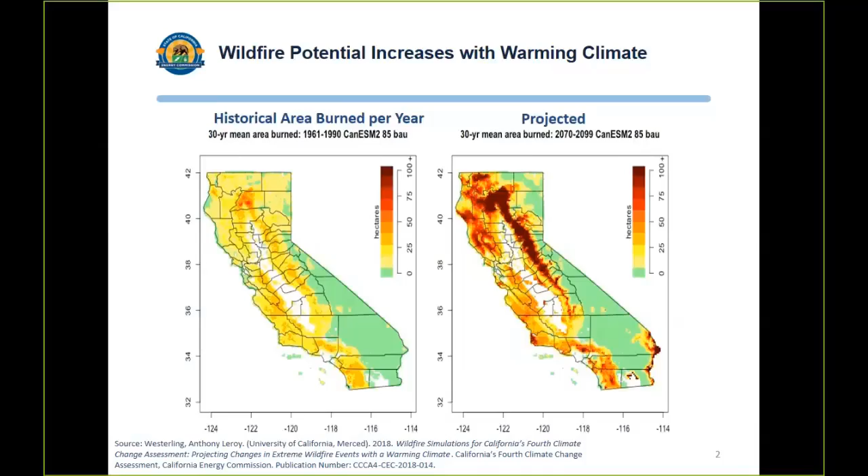One thing I do want to say is you'll hear from Dr. Larry Dale, who was funded by research from the Energy Commission, and you'll hear about his work and research that looks at the potential future risk to the electric system from wildfires.

We also have an ongoing solicitation that I want to make folks aware of right now, which is this grant funding opportunity to help look at a broader tool that can be utilized by the utilities and by the state, that will not only help look at forecasts for what the problems might be within, say, the next 7 days, but then what might happen over many decades.

This research, which is currently in the proposal stage, so we have not received the proposals yet, will help us develop a tool that will be more broadly used by the state and help us be more predictive in the near term and the long term. It'll also be utilized to help set up some scenarios and do some modeling for the fifth climate assessment. I just want to make folks aware of that. You can go on our research page and see the solicitation, and if you aren't already working on it, you can at least be aware of what's going on. Proposals will be due March 13th, very soon, and then we'll go through the selection process for that award. Up to $5 million, and it'll be a single award.

So let me move on to technology.

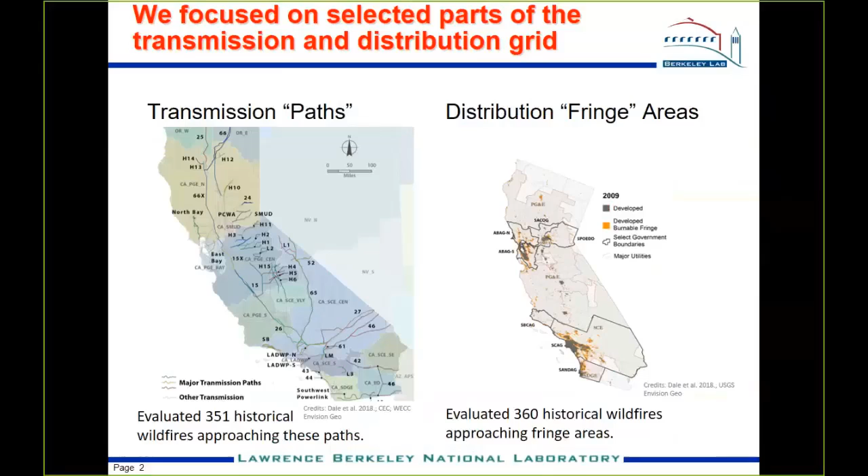Taking one of those samples, looking on the left there, is a part of the transmission grid. This is the inter-tie between the Northwest and California, which gives California access to all the hydropower produced up in the Columbia River Basin—important to California because we have a lot of green energy goals. On the right is the region around Los Angeles, and you can see in both places all those little pink or reddish-looking blobs. Those are wildfires. We only looked at a pretty short time period, between 2000 and 2016, but even in that one small part of the state up at the top, there were about 100 wildfires in that 16-year period. Of those, 16 came close enough to the grid that we thought we should look at it to see what kind of impacts occurred.

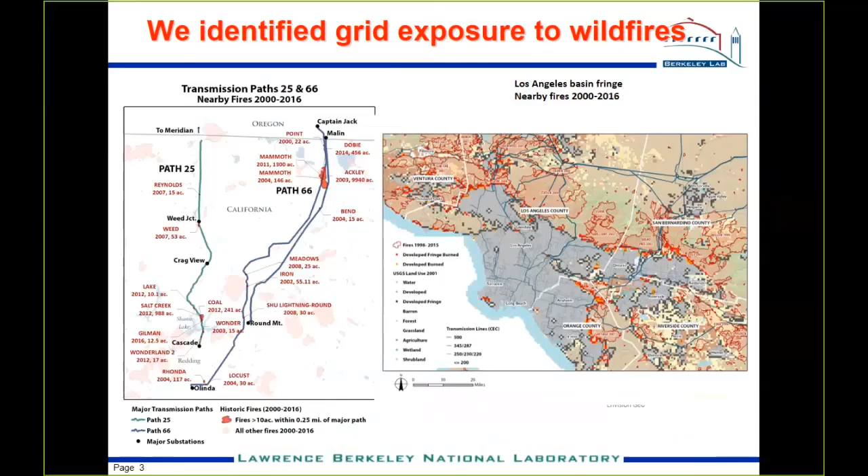On the right, around Los Angeles, there were way more wildfires. Southern California is subject to far more wildfires than we are in Northern California. Living up here, you may not know that, but it's definitely the case. So what happened when these wildfires came up against these parts of the transmission grid?

Here's a chart showing how we worked with CalISO, the agency that helps manage the grid for the state. We worked with them to find out what happened to about over 300 wildfires that approached those portions of the transmission grid.

What's shown there is indicative of what generally happens. Most of the time, nothing happens. A wildfire comes up against the transmission line, there's no outage, no disruption of service, no damage to the transmission line, and the system remains stable. There's no impact on generation either.

But some of the time there are some kinds of outages that occur, short sometimes, longer other times. Maybe more common is that they have to shut off portions of the generation system in order to access generation that won't be using lines threatened by wildfires. The general picture is a small portion of the time you have large impacts, and a large portion of the time you have small impacts or no impacts. That was true for transmission, and also really true for distribution.

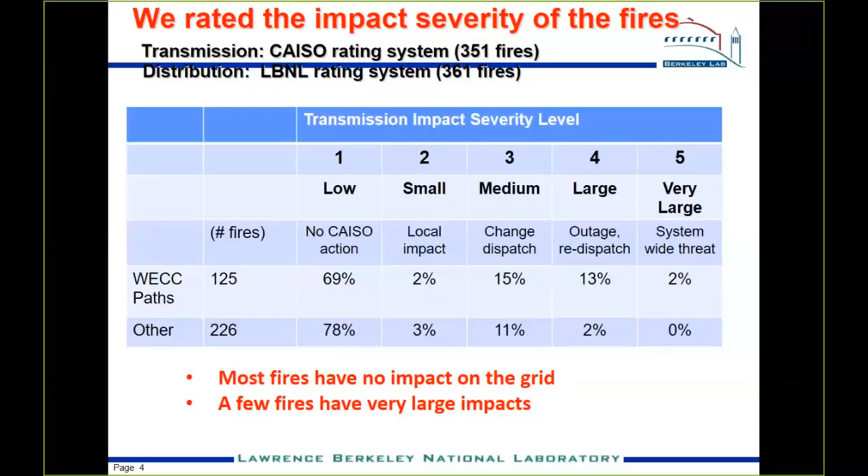Next, I want to talk about what the models are saying about future wildfires. The basic story is that Southern California fire risk is now highest in the state and has been for the entire record. But in the future, we anticipate large increases in wildfire risk in the mountainous areas for a lot of reasons that you may have heard about.

Possibly it's about drought, possibly it's about increasing biomass in forested areas—we're not thinning the forests as we used to. It could be about more homes up there, more people causing wildfires. It's really a bit of an open question, but future risk is growing, particularly in Northern California.

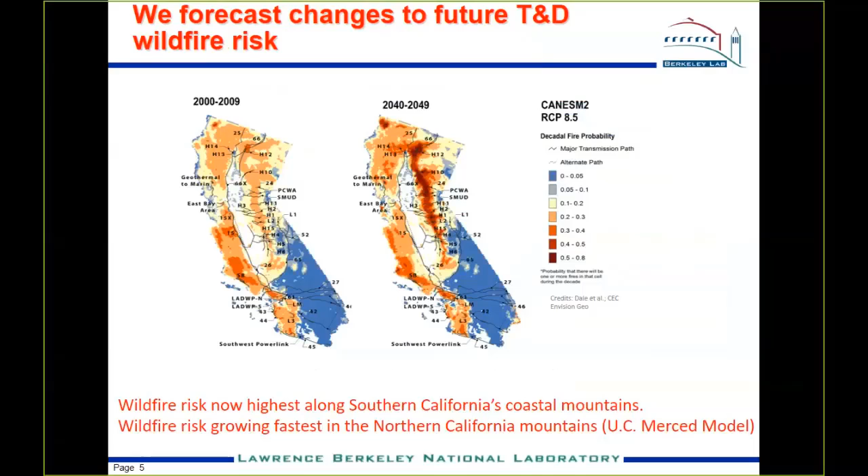The last part of the study was an evaluation of different adaptation options—what can we do about it? These were broad, big picture ideas about what could be done. You're going to hear a lot more about the details, the technologies that can eliminate wildfire risk. But in this case, we just looked at big picture options like undergrounding distribution, future planning that would limit the area of wildfire, and urban wildland interface (WUI) areas, in order to eliminate exposure to wildfires.

You can have microgrids to get rid of transmission lines, and you can diversify transmission. So those are just some big picture ideas.

My object here is to motivate the future discussions you're going to hear today, so I should say the whole study we did was in some sense overtaken by events. The major person working on our GIS mapping had to leave her house because of the Napa fires, so that delayed the study by a couple of months.

The wildfires in 2017 and 2018 effectively dated our study, because the cost of those fires was roughly equal to the cost of all the fires between 2000 and 2016. So we had to double the estimates of annual risk because of fires in one year that came at the end of our study.

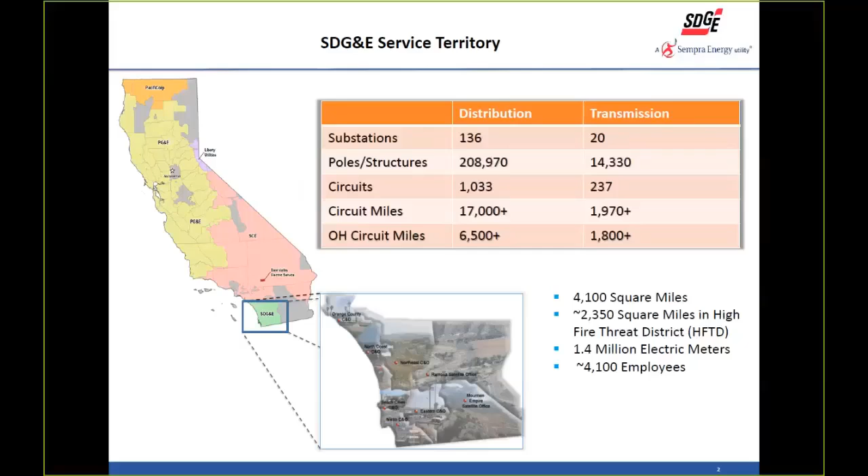So there's been an awful lot of work that has gone into fire mitigation over the last decade. One very critical piece of this is situational awareness - beginning to understand the problem well enough so that you can implement very effective mitigations. We do that in multiple ways: we look closely at the weather technology and the science, and we also take a very close look at engineering and operations. This has major impacts on our customers, of course, so there's a very large customer outreach portion of this.

But to start focusing on the fire science and the technology, we needed to understand Santa Ana winds better. I think that's kind of the basis.

How we went about doing that initially is starting in 2009, we were going to put a weather station on every single circuit that we operate in our high-risk areas. That actually resulted in 76 weather stations going in in 2010. We put in another 40 in 2011, another 30 in 2012. We're at 177 today and still growing. It's the largest utility weather network in the country, and has been for a long time, but now utilities across the state of California are building similar networks with a larger number of weather stations. The information we've gathered from this weather network over the last decade is priceless - over 100 million pieces of weather data that can now inform operational decisions, which are extremely important.

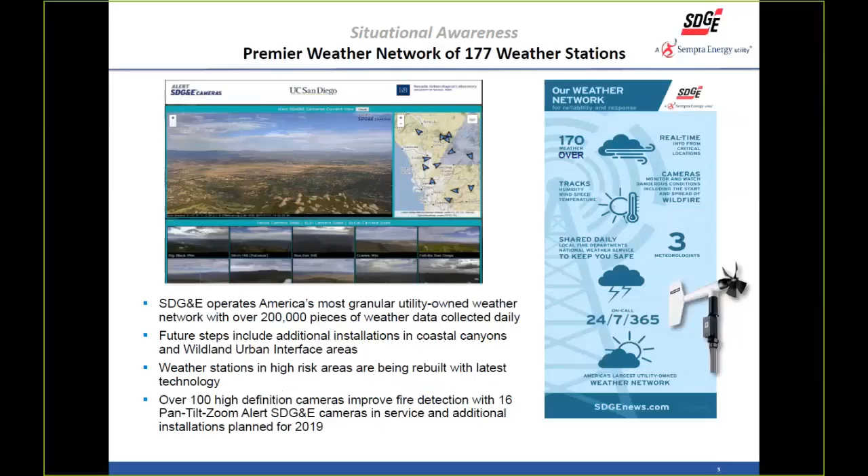And it doesn't only stop with the weather stations, it also goes into camera networks. Through partnering with academia and partnering with the community, we've enabled mountaintop camera networks right now to increase our situational awareness across our entire service territory, which means, like we've never had before, if there's an ignition anywhere on the landscape, we have real-time, high-def, pan-tilt zoom capabilities to understand very quickly if we have one of these low frequency but high impact events on our hands. Understanding that as early as possible is very important.

As we progressed in our adaptation to this increase in wildfire, we needed tools to understand what was the fire risk 365 days a year. Of course, partnered with the National Weather Service, they issued red flag warnings on days where we had extreme risk. But the reality is that we operate the electric system day and night, so we needed something that gave us the fire potential every day.

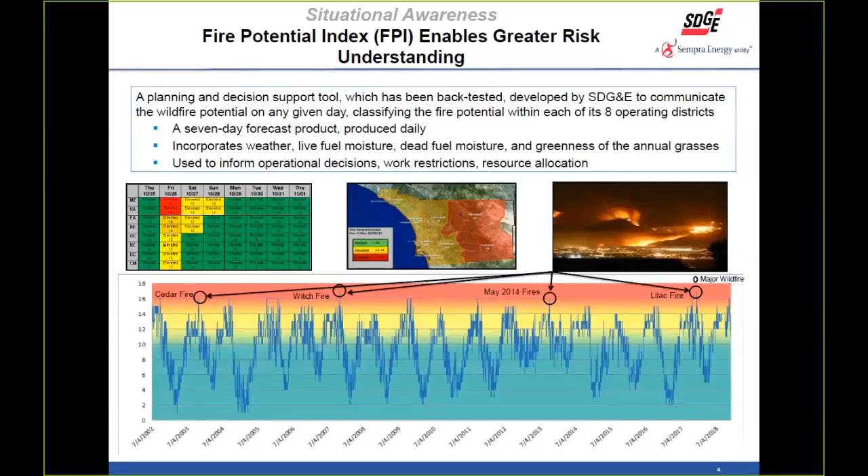For us in San Diego, this was the Fire Potential Index. It looks at some key components of wildfire: greenness of the grass, dead fuel moisture, live fuel moisture, weather - combines all those into an index that allows us to understand fire potential day in and day out. Part of the reason this is so important is that it enables us to make good decisions with the new technology that's put onto the grid.

So when you really look at some of the engineering and operational enhancements that have been made, you can see protection philosophies. Being able to operate the electric system in a sensitive relay mode and understanding the fire potential enough to know when to enable that sensitive relay is a really critical piece and component of mitigating ignitions on the electric system. The other thing you see is falling conductor protection. This is really where we're going, and it is kind of our future of ignition management. It's something that as we continue in this R&D and implement it on the system, it takes a lot of flexibility as we continue to work with EPIC, and it's long-term, with a lot of funding - multi-year phased approaches to actually execute projects like this.

But this is where we're going as we move forward, and it's really this technology to be able to sense faults on the system so quickly that the system can react before an energized conductor hits the ground. So in a sense, we're operating even faster than gravity here.

But what is a critical piece of being able to operate at these type of speeds is having an LTE network. It's the communication in place to be able to execute on this type of technology. We find that we can sample the electric system at 30 times a second, even more, and we can deal with these types of large data impacts. But a lot of what we need is the system communicating at lightning speed, and we need to have devoted LTE connections to be able to do this.

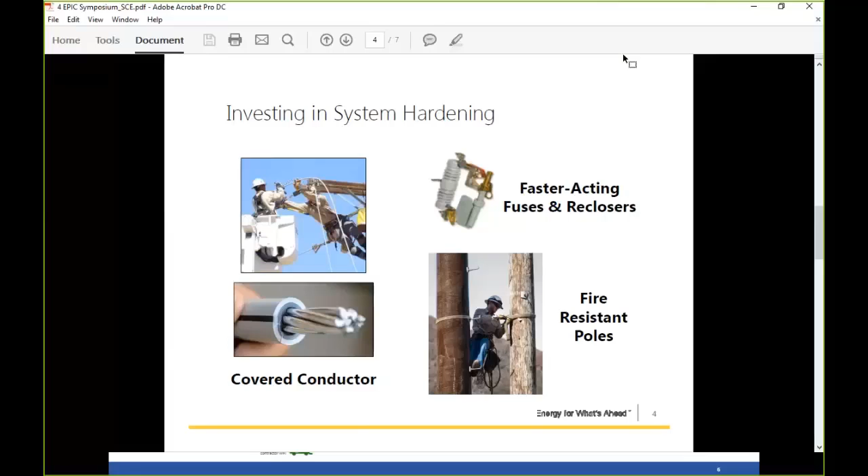As Brian had talked about, we are trying to expand our situational awareness capabilities. So we're very quickly trying to roll out a weather station network. Just within the year 2018, we installed 125 weather stations, and within the next couple of years, we're looking to build a network of close to 800 plus weather stations.

That needs to be coupled with the ability to analyze and predict the behavior of the weather, so advanced weather modeling is necessary. We also are installing fire monitoring cameras on our mountaintops so that we have visible coverage of all our high fire risk areas. All of that information feeds into a central situational awareness center that we have, which is staffed 24/7 during emergencies. Some of these cameras are available on alertwildfire.org, so they're available to the public if you're interested in viewing them.

The last area is enhanced operational practices. Some of the things we're doing in this area include infrared scanning of our overhead infrastructure. These are like heat scans that can look for high temperatures that are abnormal, or differential temperatures at connectors that could indicate there might not be as good a connection as there should be, and can indicate a potential for failure in the near future. Being able to scan our equipment and understand whether certain locations are maybe going to fail prematurely, we can then take action and replace those connectors ahead of time.

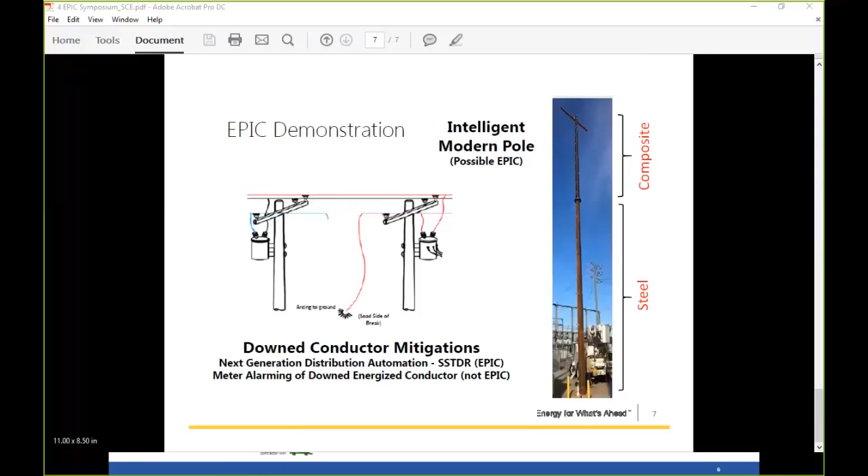Well, two things come to mind. Our study had a fairly limited time frame, and so of course I'd want to expand that time frame in order to look at past impacts of wildfires. 16 years is clearly not enough of a time period to look at.

But maybe of more relevance to this panel, I think the wildfire models, particularly the statewide long-range models, are currently fairly simple. They don't include wind impacts, and they don't include changes in fuel that occur over time. Even, for example, after a wildfire, there's a lot less fuel in an area that's burned. There are several factors like that that have a big impact on fires, and we're becoming more aware of that now just over the last few years.

So certainly I'd want to see more work on developing the wildfire prediction models. So that's sort of a plug for what the Energy Commission is already doing.

I haven't looked, and I don't really know a lot about the situational awareness capability that's being developed, but that sounds very promising. And last, I'm not familiar with the research, but certainly more research on how past fires started seems like a big issue. How many of them are just starting because of ordinary human causes? How many are being started because of impacts from the grid that we're just becoming aware of? I think this is an area of a lot of research interest, and I'm hopeful because it looks like there's a lot of research focused in that area.

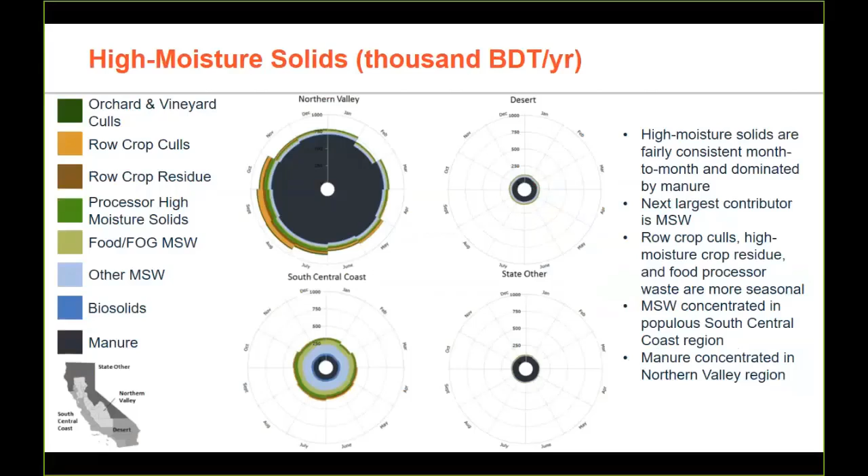And surprisingly, for the high moisture solids, you're not seeing a lot of the seasonality that we often talk about, this fear of seasonality. So there's some interesting things where you can have a pretty reliable blend of waste streams on the high moisture solid side.

But the other important thing is to say, well, what would be the alternative? What are my tipping fees? But also, what are the air emissions coming from these systems? And that's all not always straightforward.

It can be very farm specific, so we try and look at a range of scenarios of what would have happened prior to developing, let's say, a gasifier or anaerobic digester.

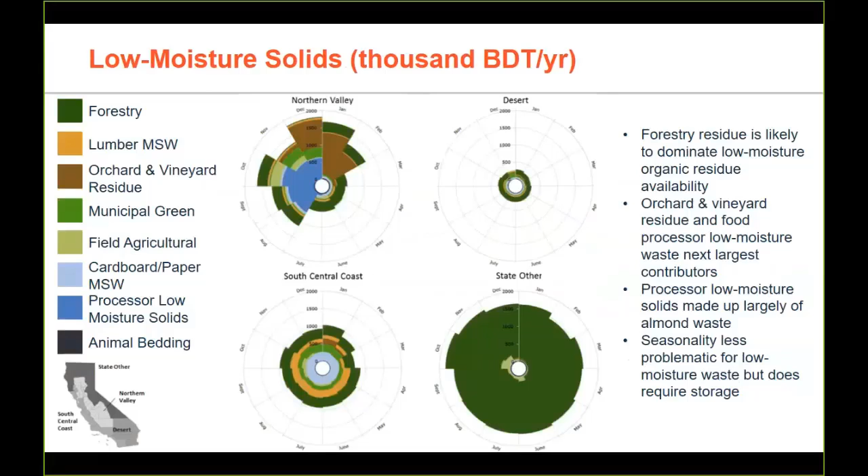In addition to these data sets, it was very important to us to make this data available. So in addition to the journal articles we publish, we've developed a biositing tool, and the link at the bottom is becoming active with all the data sets from this, as well as our upcoming life cycle assessment emissions on greenhouse gas and costs from our techno-economic analysis.

This is a very exciting tool for us, and we're hoping to couple it with other things coming out of CEC projects we're leading. One really fun one is Smelly, an odor dispersion web tool, which is supposed to identify the odor effects from building an anaerobic digester. It's very interesting.

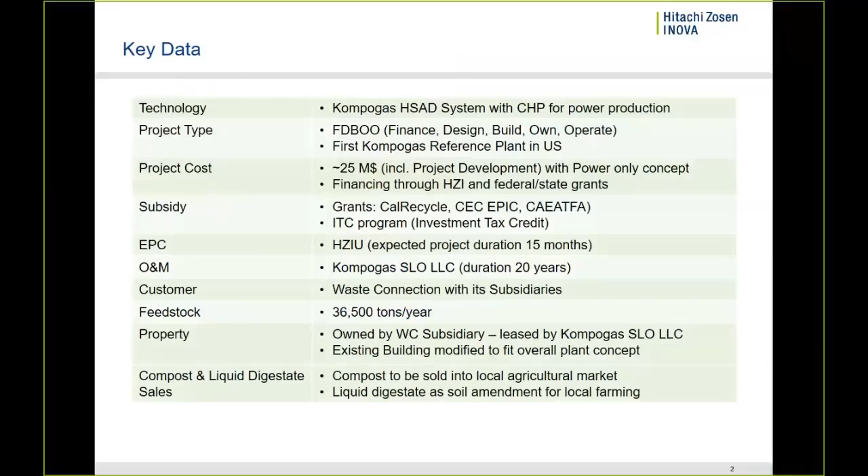The technology is a Kompogas high solids system. Our client is more or less the local waste hauler, which happens to be Waste Connections. The property the facility is sited on is also owned by the local waste hauler. Besides the renewable energy, we're also producing compost, which will be used in local agriculture. San Luis Obispo, where the facility is located, is wine country, so there's plenty of vineyards and avocado trees where we can have a beneficial use for this digestate.

This is a real brief process schematic from left to right. You have your waste receiving area, a high solids anaerobic digestion vessel. The facility operates continuously 24 hours a day. It is not staffed in the evenings and on long weekends - it's automatically fed by an automated crane. So waste receiving takes place during regular business hours, and after receiving hours are done, the facility feeds itself 24 hours a day, 7 days a week.

And then on the back end, we are taking the biogas, the medium BTU gas, and burn it in a CHP, combined heat and power unit, that runs a generator and produces electricity, as well as hot water, which we use internally for our digestion heating process, keeping the bugs in the anaerobic digestion system happy.

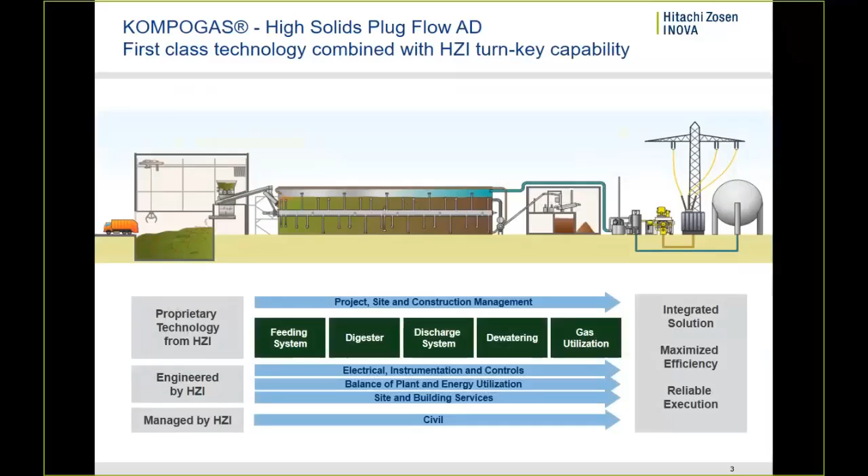These are just some pictures here. We completed major construction in July of 2018. We have been through the cold and hot commissioning process, and starting up an anaerobic digestion facility is not like flipping a switch and the thing's on. It's a long and tedious process because essentially it's a metal stomach that you have to fill with bacteria, train the bacteria to operating temperature, and then slowly but surely feed a recipe for the bacteria to digest.

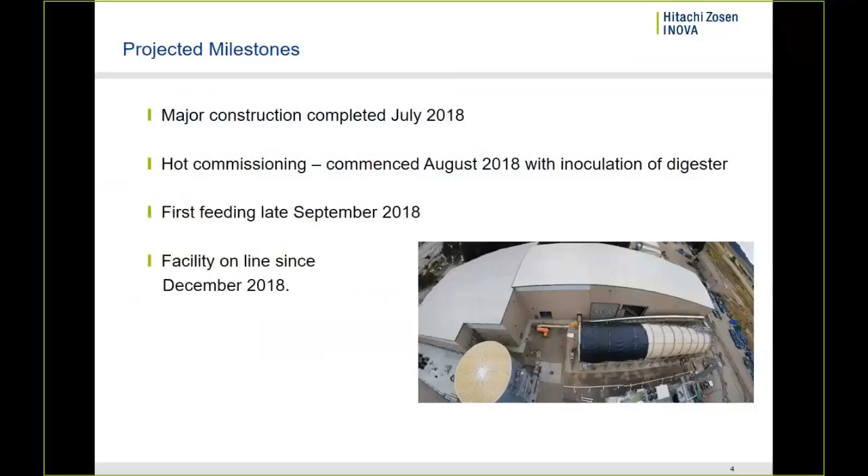And it's about a 3 to 4 month process. We have been online officially since December of 2018. This is a picture of the facility as it stands, as of a month ago or so. This big silver thing is the actual working vessel, that's the anaerobic digester. It's about 100 foot long and 25 foot in diameter.

So this is not a pilot facility. This is a full-scale facility, and actually one of the smaller ones for us, with only about 36,000 tons per year capacity. We have built facilities as large as 300,000 tons per year capacity.

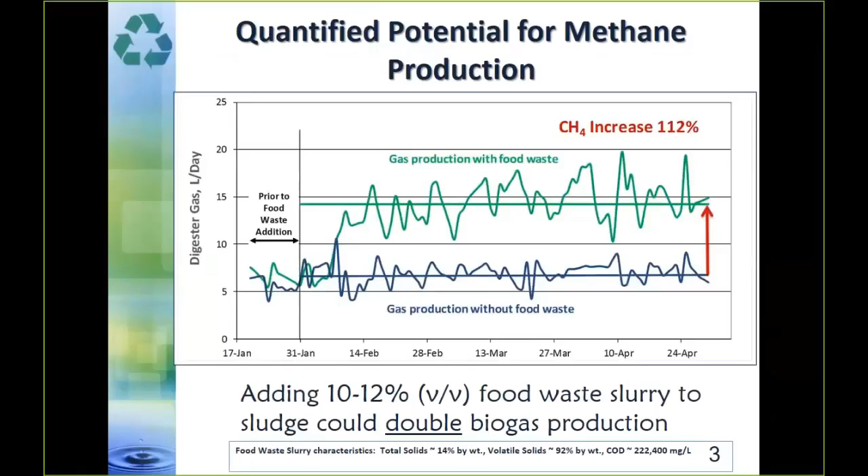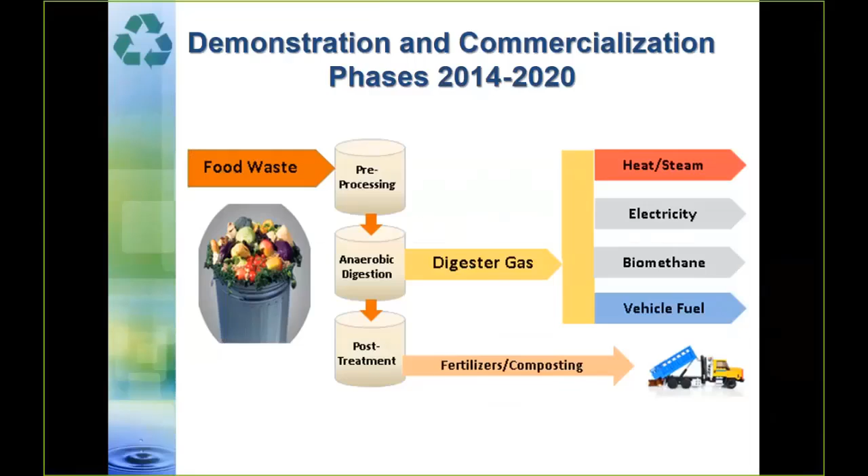We teamed with - let me go back one step. So this is a pre-processing facility.

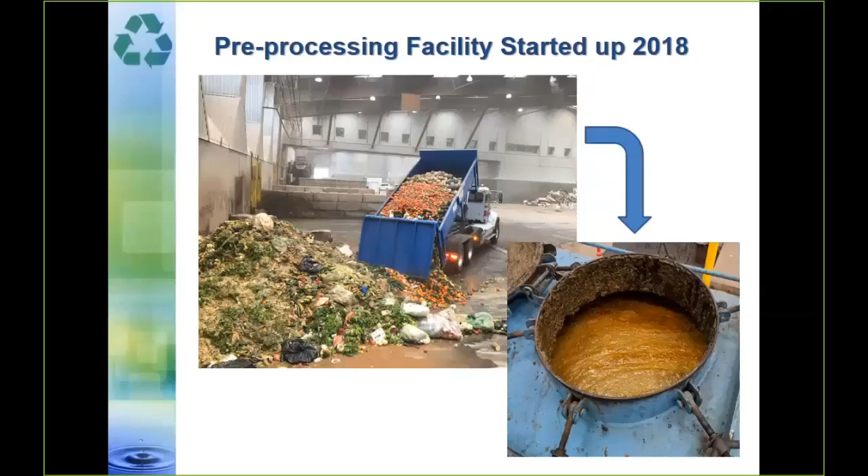At the treatment plant, we did a full-scale demonstration test. Each of these digesters is about 3.6 million gallons. The sludge stays in there for 15 to 18 days, and during that time, before we added the food waste, you eat up about half of it, and the bacteria in the digester basically outcompete all of the other pathogens. So what you come out with is smelly and nasty, but it's actually safe to make compost out of or directly put onto a field.

So for 4 years, we put food waste into digester 16 on the end, and got data from the control digester. Turned out the full scale matched the lab work exactly. It wasn't trouble-free at the treatment plant, but they knew what the challenges were and were able to address them. They know what it'll cost in the full term.

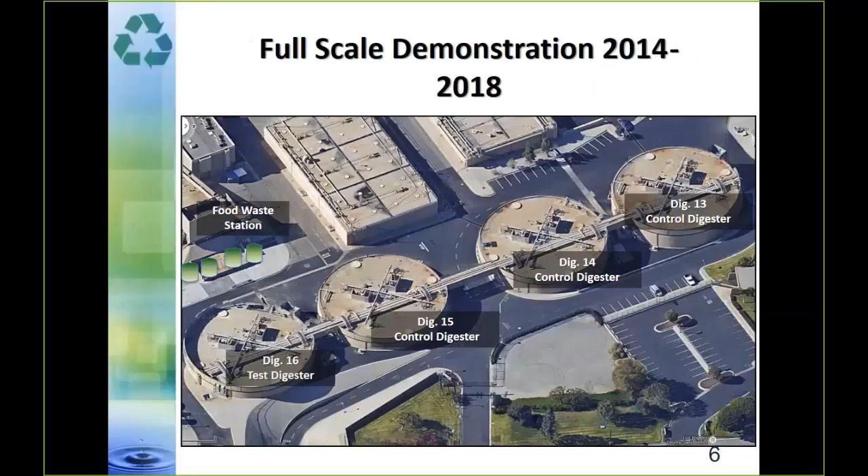So we're moving into commercialization right now, and this is the energy side of it. We have an existing power plant that uses all the methane and doesn't have more capacity, so we're going to make vehicle fuel. This is where I received about a $2.4 million grant from the CEC to do that. Commercial technology from a firm called BioCNG will basically take this gas - which is 60% methane, 40% CO2, wet, hydrogen sulfide, a lot of contaminants - and clean it up to vehicle-grade compressed natural gas.

If you're familiar, putting it in the gas company pipeline is an extra $5 million for the first molecule, whereas we have a fueling station on site, so we're going to bypass that, clean it up, and put it directly into vehicles. That should be starting up by the middle of next year. Again, thanks to the CEC for helping us fund that project.

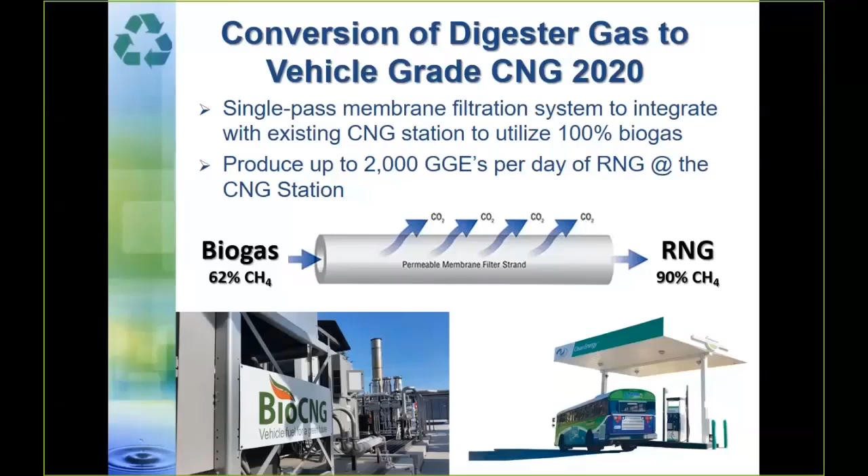You've made it to the final panel of the day. Congratulations to you all. We are going to talk today about resilient and equitable communities. I think everyone has everyone's bios. My name is Martha Guzman Aceves. I'm a commissioner at the Public Utilities Commission, and I also have the privilege of having the EPIC program as one of the proceedings that I work on. So it's really exciting to be here and seeing all of this innovation and partnership at these conferences annually.

You all should have a brief bio of all of the speakers, so I'm going to save that time and let us go into, we're going to hear about 3 EPIC projects, and they're going to each speak a little bit about their projects, and we're going to go into some questions, and then more importantly, some discourse with all of you and taking some questions for hopefully the last 20 minutes.

So with that, I'm going to start off with one particular project that 2 of our speakers are partnering on today. We have Michelle Turdo, who is the Associate Sustainable Asset Manager at LINC Housing, and she'll talk to you about that, partnering with Ram Narayanamurthy, who is the Technical Executive at EPRI. So Ram and Michelle, if you guys can take it away, and I can help you with your PowerPoint here.

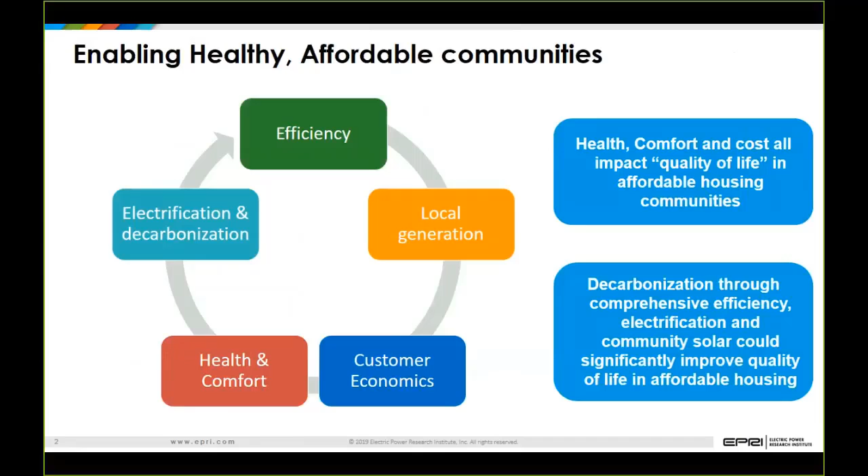Many of these communities, for example, have been there for 40, 50 years, they haven't gone through cycles of retrofits. So how do you actually improve the quality of life for the people living there, right? Whether it's increasing insulation, bringing in fresh air, reducing or improving their indoor air quality, how do these types of measures and initiatives work together to provide both energy affordability and improve the quality of life? So within this segment, we have a few different initiatives going on, many of them through the EPIC program.

So I'll just go around in a little bit of a loop. One of the ones we're working on, that we actually completed a couple of years ago through the PIER program, was taking the first look at how do you do deep retrofits in low-income multifamily housing.

We worked with LINC Housing on a project in Lancaster that looked at both gas and electric efficiency retrofits. We implemented a whole suite of emerging technologies, things like aerosol air sealing, and we looked at improving insulation with spray foam insulation. So a lot of different technologies as a suite.

One of the interesting parts was that there was a little bit of job training also offered by the solar contractor. A lot of the residents, when they got their certificates for being trained to install PV, their faces were just beamed.

Another one we are looking at right now is going into an existing full community. There's a couple of communities we're working on, one in Fresno, one in Ontario, looking at doing complete retrofits, as well as electrification of these communities so we can decarbonize the system. We'll dive into that a little bit more.

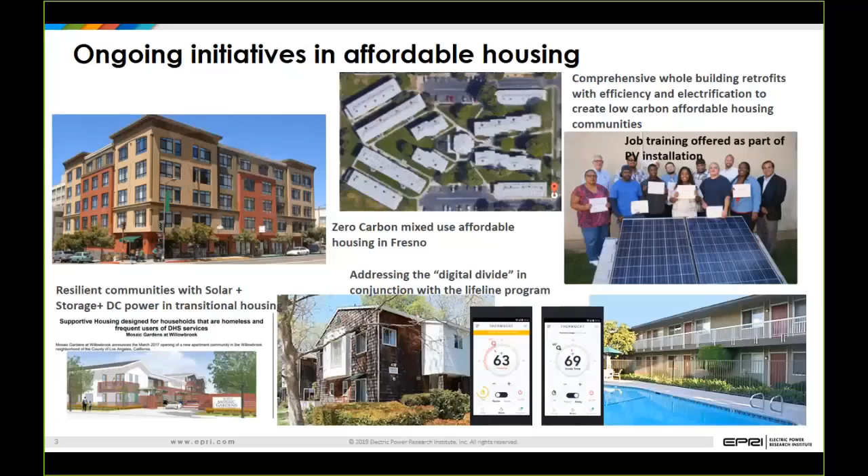So these are some of the projects that are ongoing.

One of the things we find as a barrier to many of these communities is that the products designed are either too expensive, or in a lot of cases we just don't have enough electric distribution to be able to do the HVAC systems upgrades. So we're looking at technologies from Italy, for example, that can plug in at 110 volts and provide a retrofit heat pump solution. There's a lot of interesting technologies you get into as you get into the depths of these projects.

So what did we learn? When we go through the electrification process, we've done the efficiency side first. There are technologies that work well, like community water heating systems in multifamily communities on the efficiency side. But when you go into electrification, what we find is that one of the big barriers is a lot of these communities don't have enough electric distribution capability.

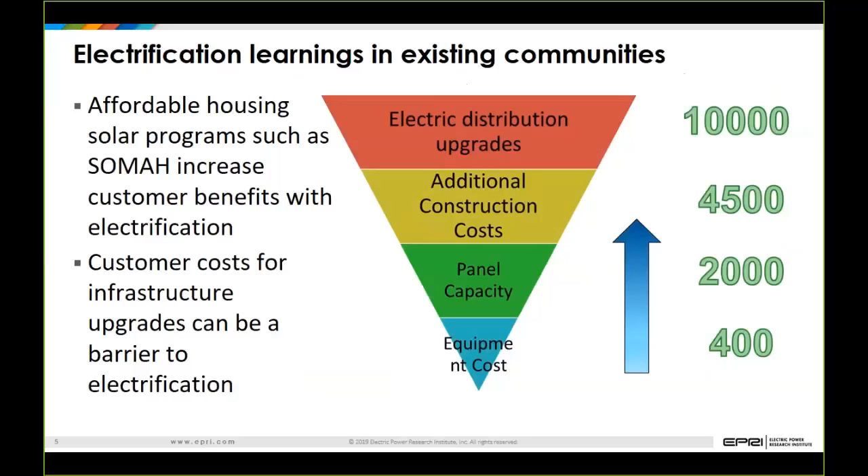That's part of what we have to do as a state: look at the infrastructure and what we have to do on the infrastructure to be able to upgrade existing communities to decarbonize the building stock.

When we look at it holistically, how does Michelle, as a property owner, implement these upgrades? We have to synthesize this alphabet soup of programs—utility programs, the low-income weatherization program, the solar generation program, on-bill financing. There's a whole host of programs. For a property owner, how do you get those programs to work together in a concerted manner so you can do these deep upgrades that improve the quality of life of the tenants?

Then, how do you take all these programs and wrap financing around it—whether through tax credit refinancing, which happens in the life of these buildings, or bringing in third-party financing systems that can wrap upgrades, retrofits, and programs together so you can have an easy-to-implement package for the property. So that's it.

It goes all the way from the technology side—what technologies work—to ultimately the point where a property owner can apply the suite of technologies in a coherent manner. So with that, I'll transfer it over to Michelle to talk about her perspective on what we put her through.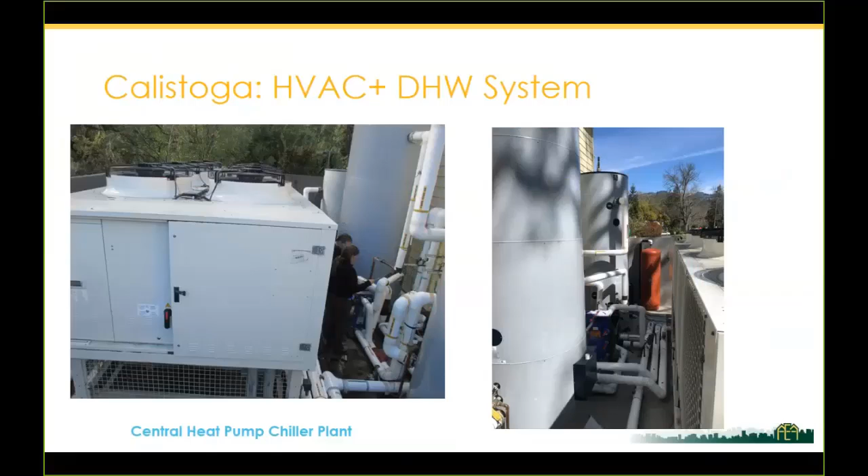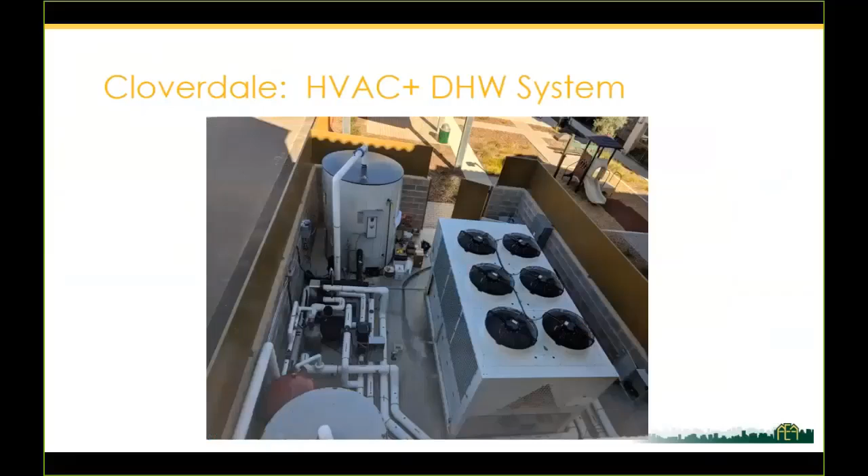These systems have a component where, when in cooling mode, they extract the heat that comes back from the fan coils, the waste heat in cooling mode, and transfer it over to the heating side. So the systems operate at their peak efficiencies, the highest COPs, when in simultaneous heating and cooling mode. That's Calistoga. Cloverdale has almost the exact same system, but with some modifications or differences in piping, pumping, and controls, though pretty minimal changes. By and large, the same type of system.

Atascadero has much more typical, common electric systems for mechanicals. They've got individual units, each served by an individual heat pump water heater, which you see on the right, and then an individual heat pump HVAC system on the left.

Our focus on this project, or one of the things we're focusing on, is around the use of heat pump water heaters for thermal storage.

Starting next week, we've been monitoring all these systems for quite some time now. We've collected baseline data, and next week we'll start some experiments testing different load shifting strategies — charging these tanks over a certain period to a higher than standard temperature, then riding through grid peak for as long as we can.

There's a variety of different strategies we're going to test: different set point temperatures for setback, different load up temperatures, different mode changes. That's one of the more exciting things I think will come out of that project.

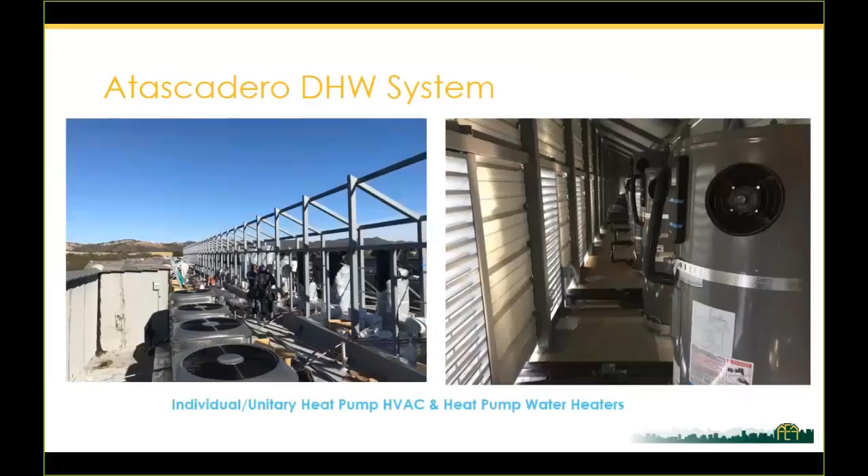The last project is Benner, which has two central water heating plants that are both CO2-based heat pump water heaters. In this case, we've got what was originally designed as a unitary type system, like the type used in a single-family home, that we've cobbled together to turn into a central system.

So multiple heat pumps charging — either you can do multiple large tanks or individual tanks.

This is a system that's becoming more common. We're doing these systems in some of the programs that we implement as well.

In this project, we got to test out a bunch of the best practices we've learned from smaller projects we've done and projects others have done, and cobble that together. One of the unique things I'll probably speak to later is the transfer of knowledge between programs and research — this is a good example of that. I'll talk about it more later.

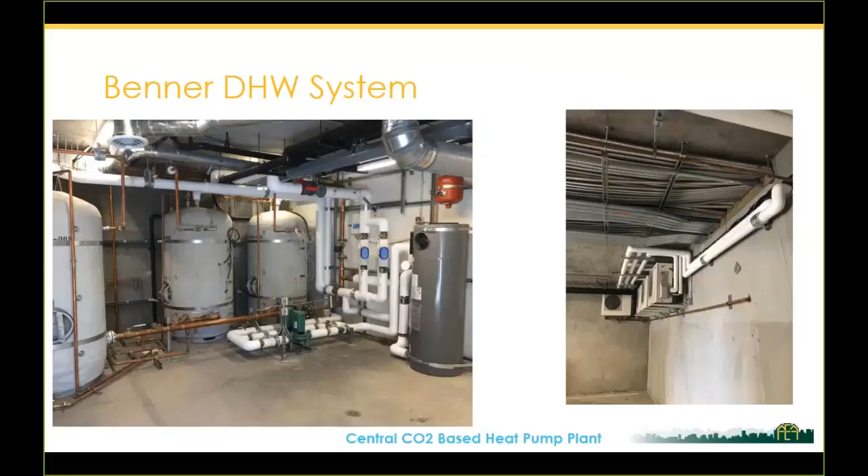All of the projects are extensively instrumented, and that's been over the course of the last year. We've been getting all the monitoring equipment installed and tested, working through a variety of network-related issues, which has turned out to be probably the biggest challenge of this project — dealing with Wi-Fi communications, routers and modems going down, and things of that nature. That's been a big lesson learned that will ultimately play into future smart control strategies in terms of demand response, and what kind of network communications are actually going to work and be effective.

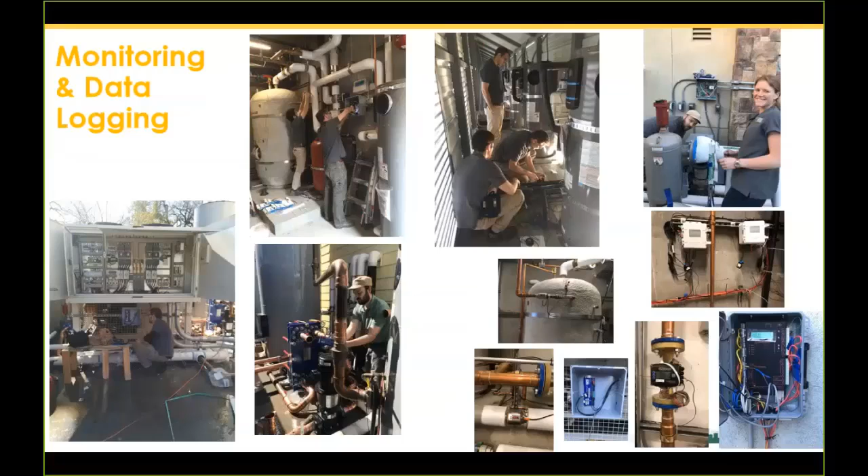These are a few of the research questions focused on the domestic hot water side of things. We're really trying to improve our understanding of the economic and performance trade-offs of a few of these things: central versus individual systems. We have 3 of the buildings with central type systems, and 1 with individuals, but we have lots of other projects with unitary equipment or individual systems per apartment to use as a baseline comparison.

Combined systems versus separate — the first 2 projects were examples of one system providing heating, cooling, and domestic hot water, versus the other projects that have those systems separated out, and there are benefits and downsides to both. Electric versus natural gas — these are all electric properties, but we've got plenty of natural gas projects to compare them to. And finally, the thermal storage and load shifting that I talked about at the Atascadero project.

Ultimately, there are a lot of results that will come out of this project, but the main one is the design guides and best practice tools that we'll develop, as well as a bunch of code-related algorithms and code recommendation changes.

Just to touch on one other project that we're involved with that's due to launch in Q2 of this year. This is a project with Rocky Mountain Institute and a slew of other partners, and it's around the idea of a mass deployment model for zero net energy retrofits.

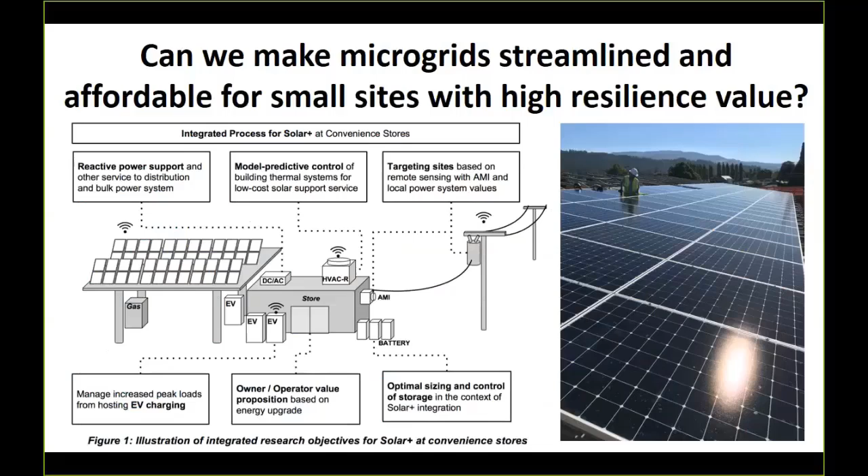So the tasks that we're doing in this research project: we're designing and constructing a solar and battery system. The specs on that are it's a 60 kW solar array and a 109 kW, 174 kWh battery. It's enough to not quite net out the energy demand. Convenience stores, it turns out, are the most energy-intense commercial building per square foot of any commercial building, because of the giant walk-in coolers that hold all the cold beer and cold drinks and ice cream, and typically really poor insulation, big doors that open when you walk in. So there's a lot of energy to play with here.

We're designing and implementing software for model predictive control to optimize the operation of these facilities. And then once it's built - this is going to be this summer - we're going to be operating and testing our ability to provide demand response service to the grid, to provide a value proposition to the owners, and really understand what happens when we kick the tires of this microgrid at the gas station.

All along the way, we've been doing market research. We're in touch with the industry association for the fueling station industry in California and nationally, and are connecting with their members to understand what do they need, what are the things they're looking for and the problems they're trying to solve, so we can see how our research fits in with their problem, rather than the other way around. And we're doing synthesis work where we'd like to roll this into a hardware and software package that, with a little bit more work, can be ready to deploy and to scale up. Now that's the vision - we don't want to just do this once.

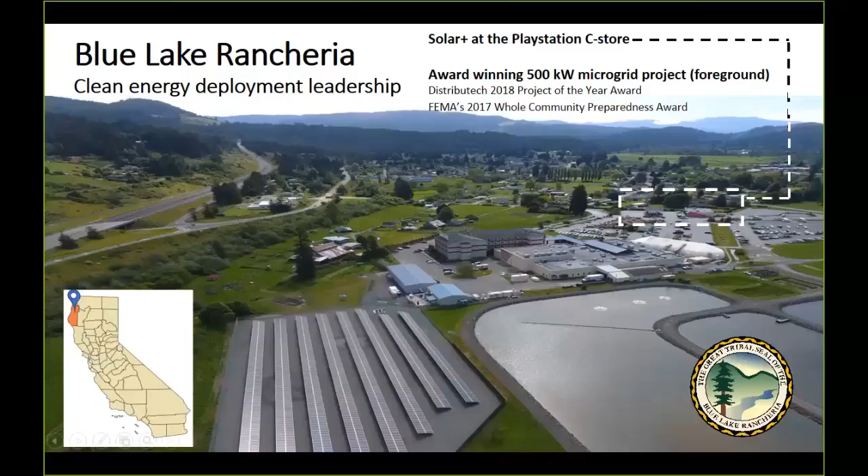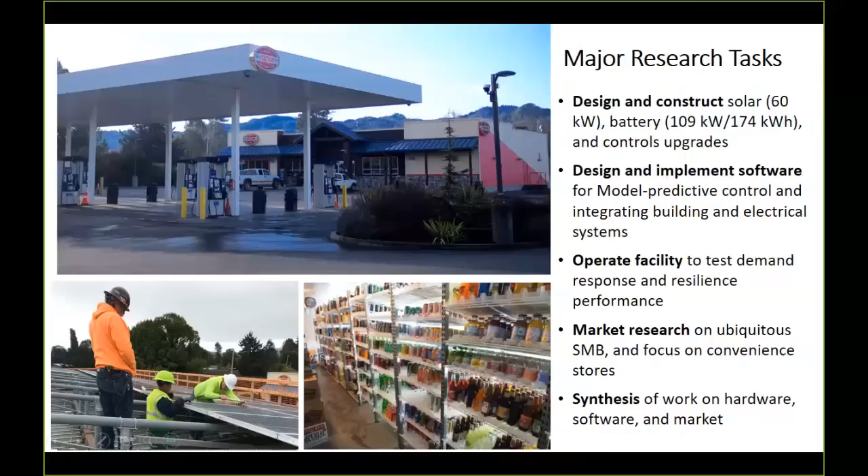Sorry, Madeline. It's over there again. Oh look, you can see it on there, just not on here. Not there. There we go. Okay. Let's see, okay great. How many dells does it take for a community advocate to be around technology people?

Hi, my name is Madeline. Thank you so much to the Energy Commission and to Commissioner Guzman-Aceves and to all of you for the opportunity to spend time with you today. I'm very excited to talk with you all. I just do want to recognize as well the California Energy Commission's continued commitment to low-income and environmental justice communities and better serving them through EPIC.

My name is Madeline, and I am the Energy Equity Legal Counsel at the Greenlining Institute, which is a racial justice nonprofit in Oakland, California. Our mission is to ensure that race is never a barrier to economic opportunities and that communities of color can prosper. My work focuses on supporting a community-led just transition away from fossil fuels, where those who are most impacted by the fossil fuel status quo can prosper.